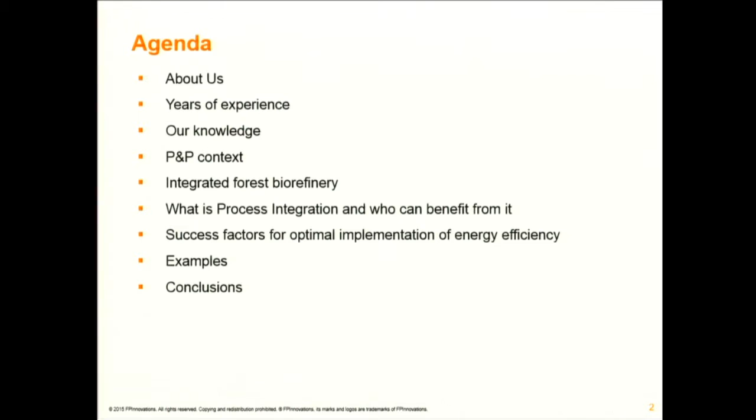So, as you can see in the title, the subject is going to be kind of similar to what Professor Paris just talked about, but with a much lower level of detail. So if there's something that you didn't understand in the previous presentation, I hope you will understand in this one. So today I will give you a brief explanation of what FPInnovations does and what we are, the context of the pulp and paper industry, what an integrated forest biorefinery is, what process integration is and who can benefit from it, the success factors for the optimal implementation of energy efficiency techniques in the actual processes, some examples and the conclusions.

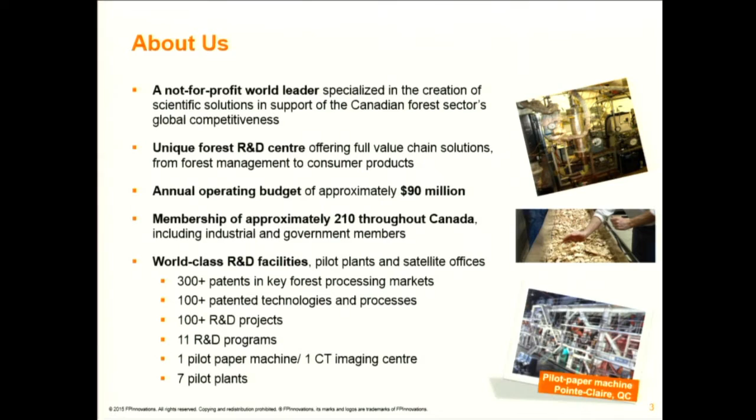So what we are: FPInnovations is a not-for-profit organization. We are a unique forest R&D center that considers the full value chain of the forest. We have approximately 210 members throughout Canada, that means Canadian mills, governments, universities. And we have world-class R&D facilities. We have pilot machines, we have many R&D projects, we are very active in developing patents. And as you can see here, we have been around for a while.

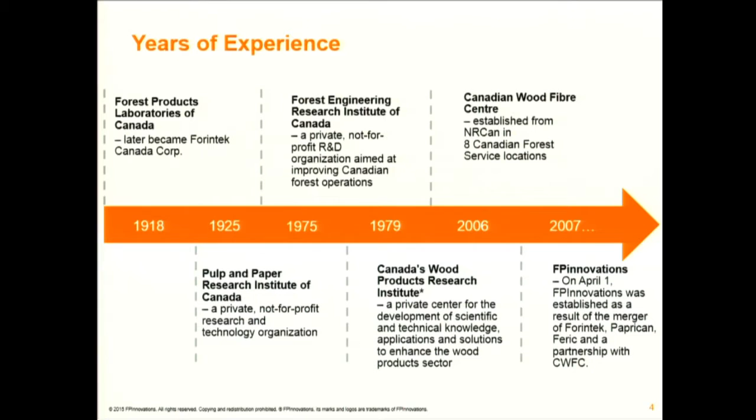FPInnovations is the merger of three former research institutes: the Pulp and Paper Research Institute of Canada, the Forest Engineering Research Institute of Canada, and the Forest Products Laboratories. So in 2007, the three organizations merged to have one voice when dealing with the forest industry. So that's how FPInnovations was born.

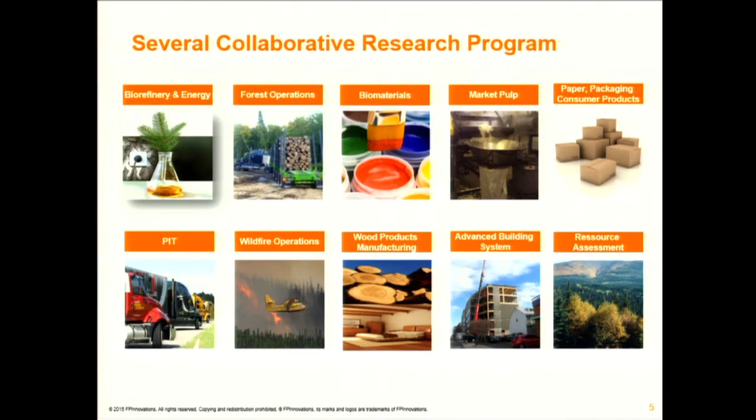We have 10 research programs. So basically, when we talk about energy, we talk in the biorefinery and energy sector, but also about market pulp. This is when we talk about energy efficiency related to projects. But PIT is one of our programs; they look at energy efficiency from the perspective of cars and improving the efficiency of fuel combustion and stuff like that. So you can see that we see energy efficiency from many perspectives. But myself, I work in the market pulp and the biorefinery program.

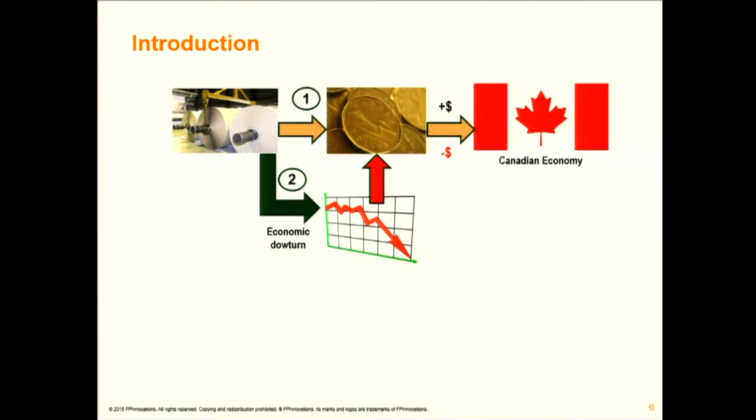So as Mr. Paris just mentioned, the pulp and paper industry was a big contributor to the Canadian economy. It still is. However, the economic downturn of the industry and also the global economic situation had a negative impact on the Canadian economy. So the industry started thinking about what they can do to improve and become more profitable and still remain a big contributor to the Canadian economy.

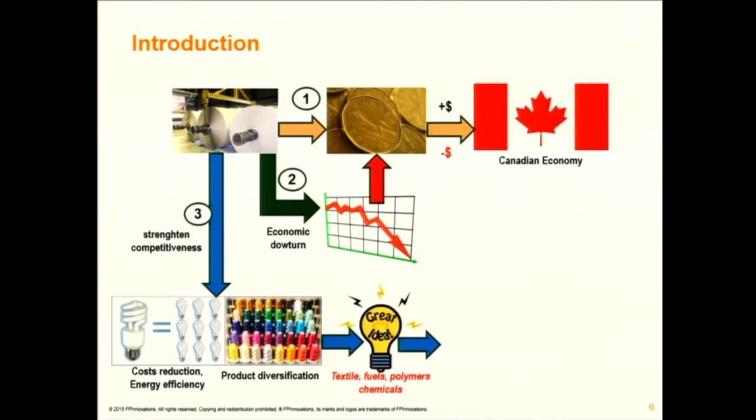So they looked first at cost reduction. For example, here's where energy efficiency techniques appear, but they also wanted ways to diversify the products that they were producing. So for example, the ideas that appeared were that they should enter textiles, produce fuels, polymers, chemicals. So there is a bunch of options that appear and that still need to be evaluated.

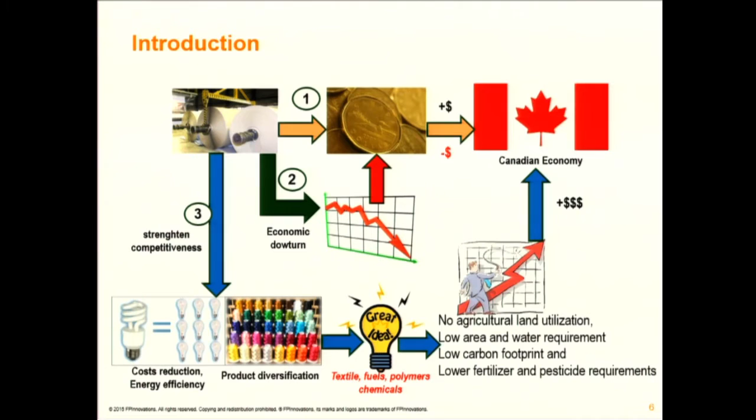Forestry has an advantage, for example, when we compare ourselves with agricultural land, because we don't use agricultural land, so we're not competing with producing food for human beings. The area required is lower, it's a lower carbon footprint, and also we don't use pesticides or fertilizers. So when we talk about biorefinery, this is the typical definition: the utilization of forestry biomass to produce a spectrum of products by various extraction and transformation pathways.

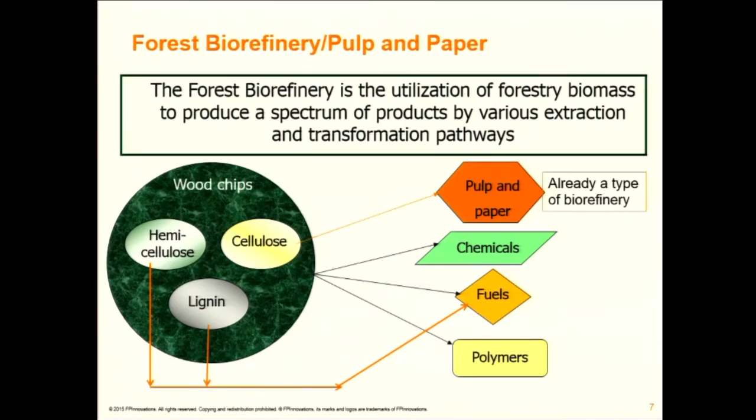So in industry, the processes are already a kind of biorefinery, but now what we are looking for is to use these two and to produce value-added compounds that will bring more revenues to the industry. So then we will remain economically profitable.

So to give you a context in terms of the energy aspect of the industry, the pulp and paper industry is Canada's most energy-intensive sector in the manufacturing industry. It accounts for 25% of the total manufacturing consumption, 30% of the total manufacturing cost. And one important thing is that of all the energy that the pulp and paper industry uses, 55% is generated from biomass. So still, there is 45% that comes from somewhere else: fossil fuels, or electricity generated by different means.

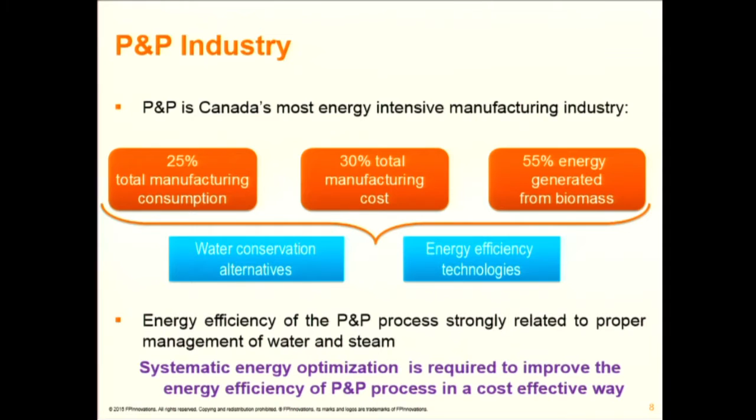So that means that the industry needs to look for energy efficiency technologies. That's where this comes in. Also, water conservation alternatives. And as Professor Paris explained, in pulp and paper processes, water is used, but this has a big relationship with the utilization of energy. If a process uses too much water, that means that the process is using too much energy. So that's why we need to take a look at both aspects when we try to improve the energy efficiency of a process. So what we want is a systematic energy optimization way to improve the energy efficiency of pulp and paper processes in a cost-effective way. That's very important.

So to give you an idea, as Professor Paris mentioned, there has been a decline in the pulp demand overall. So that means that the current pulp and paper mills were designed for other capacities. So now the mills are working with a different set of operating conditions, with a different configuration, and with different utility systems. Those are the systems that deliver the steam and the hot water that the process requires. So the initial design of the plant is completely different to how it is operated. So there is a need to improve the operations of the process. And more than a need, it's also an opportunity for the mills to reduce their energy cost and also to diversify the revenues that they generate.

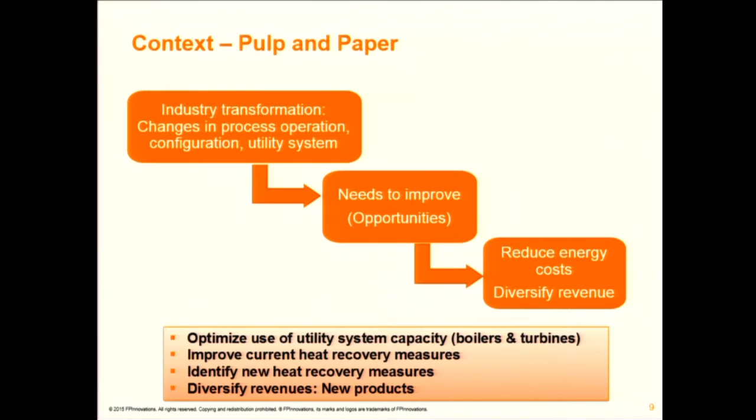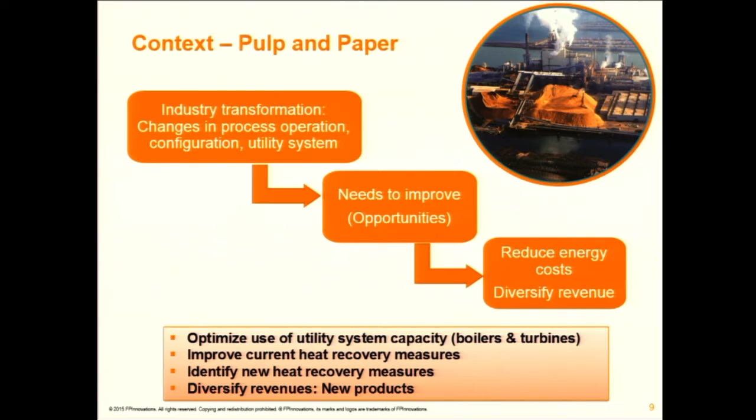So for example, when we look at energy efficiency in a mill, we try to optimize the capacity that they have in their boilers, in their turbines. We try to improve the current heat recovery measures that they have in place, and also identify new ones if it's possible. And the other thing that we look at is diversifying the revenues. So here I just wanted to put an image of what a pulp and paper mill looks like. You can see there is a lot of steam going on. So this is a lot of energy that is being wasted. So even though pulp and paper mills are integrated, there is still a big opportunity to recover the energy and to make them more profitable.

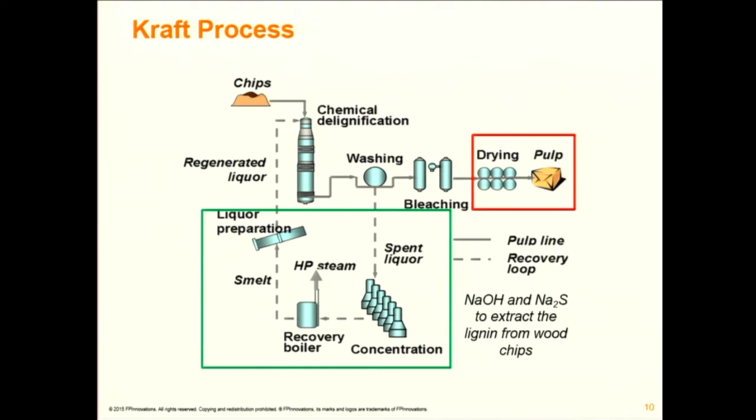So just to give you a brief explanation of what's a pulp and paper mill. This is a kraft process. So basically, you have a chemical delignification part where you separate hemicellulose, lignin, and cellulose. As I said before, what we want for the final products in the paper is mainly cellulose. So in the washing and the bleaching sections, we take out all the lignin and hemicellulose that remains in the process. Then we dry the cellulose, and that's our final product. In the recovery cycle, we recover all that lignin and hemicellulose that remains, and we burn it to produce steam that is then used in the process, and also to recover the chemicals that were used initially. So you can see that the process is already kind of integrated, and that's what makes it economically feasible.

So just to go a little bit more in detail, you have, as Professor Paris mentioned, the pulp line, and you have the recovery loop. But all around this process is where all the energy is produced. So we have a steam system; we produce steam through different types of boilers that can use biomass or fossil fuel. Some of them use the black liquor, that is the hemicellulose and lignin contained in the wood chips. And we are using water. Nowadays, one of the ways pulp and paper mills are diversifying their revenue is to produce power. So units such as condensing turbines or back pressure turbines have been implemented in pulp and paper mills to export power to the grid.

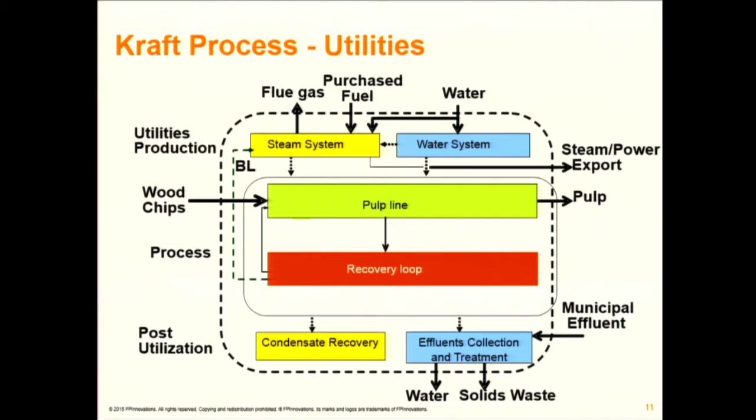So, in addition to the complexity that the process already has, if we want a biorefinery, then we will add completely new processes. One of the advantages that the integrated forest biorefinery has is that it has the kraft mill with already all the utilities, already all the heat and water. And we just need to find a way to integrate them, to make them more profitable.

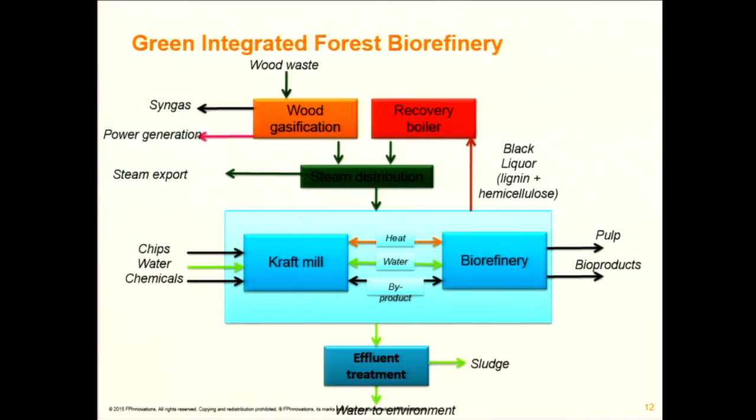And there are other options, for example, using a gasifier. So they can produce additional compounds, additional value-added products, power, and then supply the steam that the whole biorefinery will need. However, we need to maintain the core product so the mills can still run.

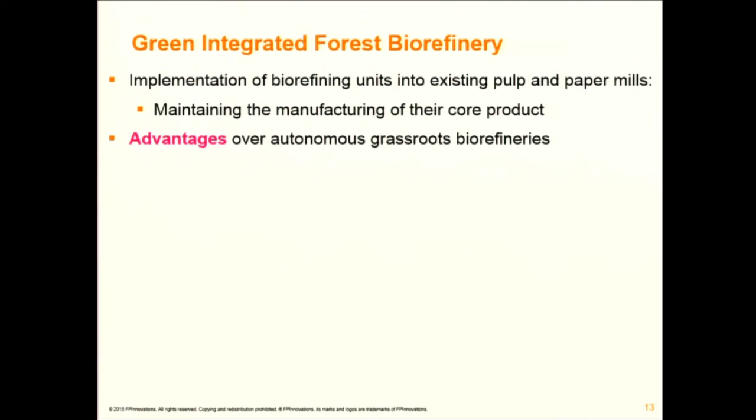So there are some advantages of the integrated biorefinery over a new biorefinery. For example, in kraft mills, there is already the infrastructure in place. That means we have all the support networks, direct access to the raw materials. There is attractive utility cost, and there is qualified manpower to run the mills and to run the new plants. So everything is already in place, and there is a lot of infrastructure that can be used to integrate the process. We don't have to start from zero.

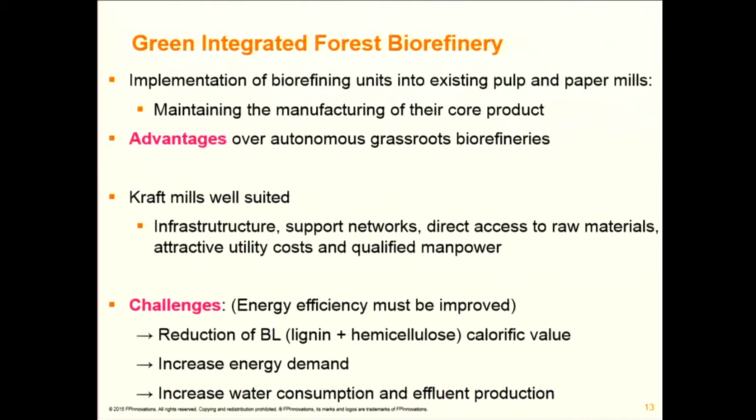However, there are challenges. Energy efficiency must be improved, because there's going to be a reduction of what we were previously using as a fuel for the process. Now we want to use lignin and hemicellulose for another value product. That means that the process has to be more efficient, so it doesn't increase its energy consumption. And also, we don't want to increase the water consumption and effluent production.

So one thing that characterizes the way we approach the studies is process integration. When we talk about process integration, we analyze a process as a whole. So we don't optimize just specific parts. As I just mentioned, the pulp and paper mills have different departments. Every department has a different need for steam, a different need for power. So when we look at the process, we look at the process as a whole.

That's because what was found before is that when you're optimizing just one specific part of the process, that might have a negative impact somewhere else, and the overall efficiency of the process will not be improved. So that's the main mindset that we follow when we target energy efficiency.

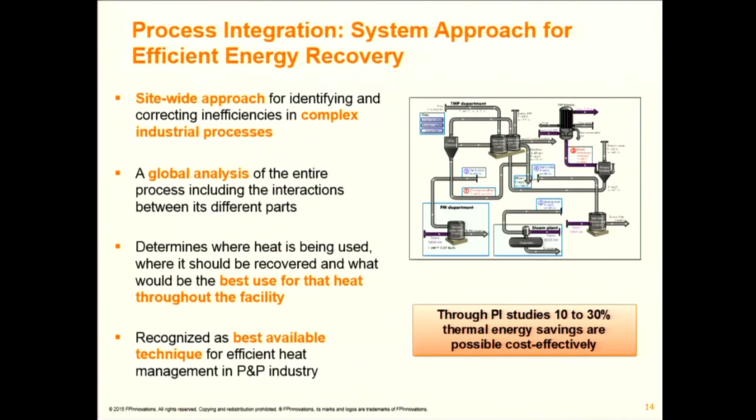So process integration is a site-wide approach that identifies and corrects the inefficiencies in complex industrial processes, such as a pulp and paper mill. As mentioned before, it's a global analysis, and what we want is to determine where the heat is used, where it should be recovered, and the best way of doing it. This technique, process integration, is a best available technique, and it has been used in the pulp and paper industry with savings between 10 and 30% reduction of energy consumption. So you can see how powerful it is if it's correctly applied.

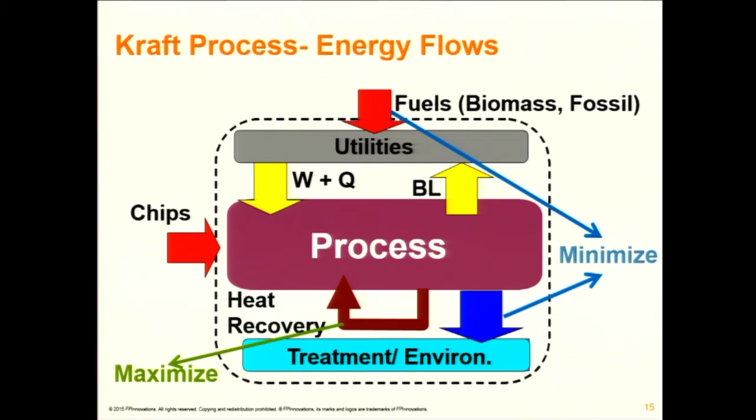So I come back again to the same diagram that I mentioned before, but much more simplified. You can see the energy flows that exist within a process. What we want is to maximize all the energy that is used within the process while we are minimizing the fuels and minimizing what we are wasting. Because if the process is not efficient, every extra energy that we put in is extra energy that is degraded and then sent to the sewer or to the environment. So you can see how powerful the technique that we use is.

So the technique that we use, as Professor Paris mentioned before, just going a step backwards, is based on a graphic representation. What we look at is the quality of the energy that is used in the process and the quantity of the energy that we are using. Basically, when we have a chemical process or pulp and paper processes, what we supply to the process is a high temperature energy source. In this case it would be steam.

Let's say normally we supply steam at 140 degrees Celsius. However, the process requires a lower temperature, a lower quality of energy, around 70 degrees for most of it, let's say, to heat up water. And then there is energy that is going through the effluents. Normally this energy goes at, let's say, between 30 and 50 degrees Celsius. So what we are looking for is to reuse the energy at this stage, so we don't waste high temperature energy that could be used for something else.

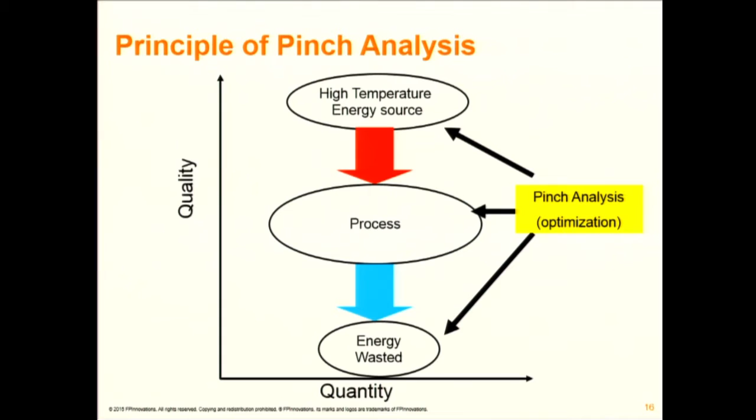So here is where the pinch diagram comes in. This is a representation of the temperature, that is the energy quality, and the enthalpy, that is the energy quantity of a process. What is very powerful about this tool is that it's a representation of the whole process.

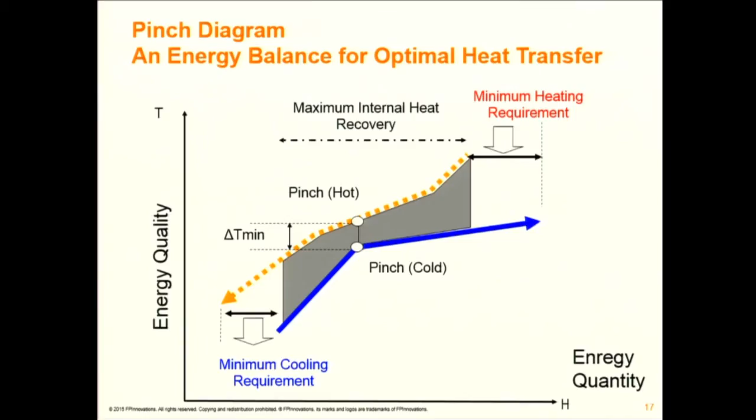So we have all the streams that need to be cooled down, and we have all the streams that need to be heated up. And what it gives us is just a target. So it will give us the minimum theoretical heating requirement of the process, and the minimum theoretical cooling requirement of the process, or the minimum energy that we will be wasting. Okay, so this is just a parameter that we use to identify the projects that we are going to implement in mills.

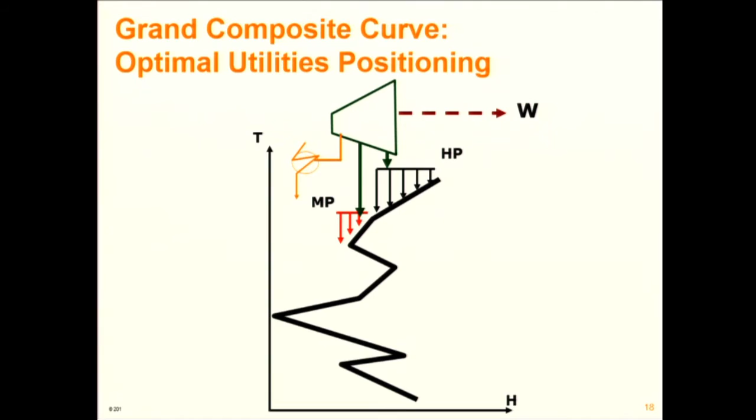There is another tool of the analysis that is also based on the temperature versus enthalpy diagram. It's called grand composite curves, and it's just a temperature profile of the process. And what it allows us is to determine what's the temperature of the utility, of the steam, that needs to be used. So that will help us to increase how much power we can produce. And if we are to implement heat pumps, it also tells us where the heat pump should be placed, so we actually recover energy.

So just from a practical perspective, in order for this to be successful, yeah, it seems very nice, it's a great methodology, and I can tell you theoretically it works perfectly. But the thing is that in the context that we were working, it's mills that are already there, mills that already have internal heat recovery measures in place. They already have a mindset about energy. So when we go there, we rely a lot on how we communicate with the engineers there.

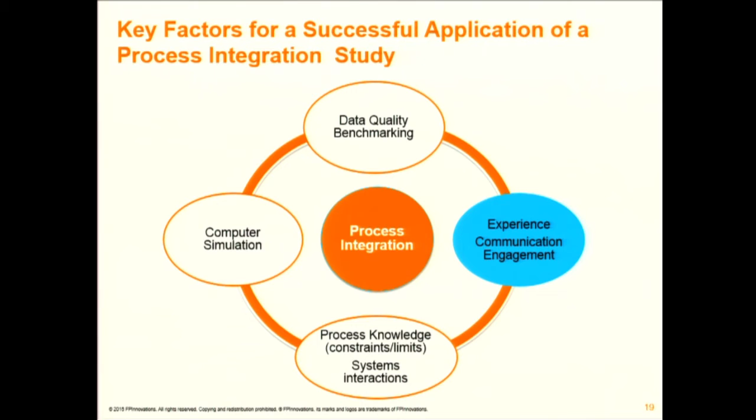Normally, the people that work in the process know the limitations, they know the constraints of the process. So really, we need to include that in our analysis. If not, anything we propose is not going to work. So that is the key part. Then we also use computer simulation, which has helped us to try scenarios of what will be the impacts of changing the operating conditions of the process, or introducing new measures for internal heat recovery. Also the quality of the information that we receive: if we don't have a good set of data to do the evaluation, anything we propose is not worth it. It's like garbage in, garbage out.

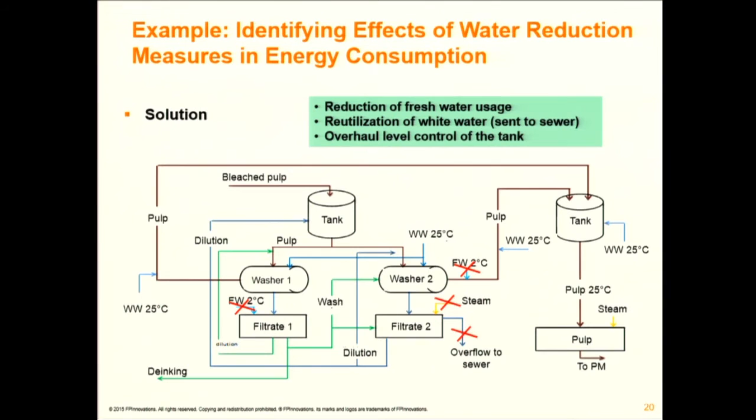So just to give you a brief, this is an example of a current mill. As you can see, it's very, very difficult. This is just a water network. These are different departments, not actually the same department. So what we were looking at, from a process integration perspective, is to reduce the overall consumption. We realized that the mill was using fresh water, then they were using steam, and then they were sewering to the effluent, and then they were using fresh water somewhere else. So imagine you're here in Canada, in the winter, you're heating water at 60 degrees, and somewhere along the process you're using water at 2 or 4 degrees. So that's very inefficient.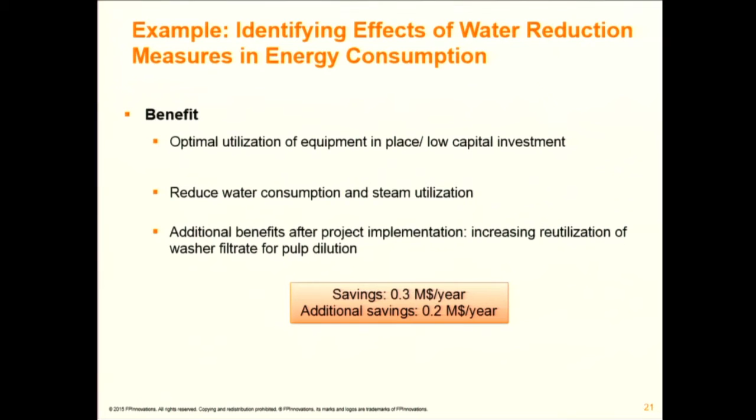So maybe one person in one department will not realize, but when we look at the whole picture, we identify that that's something that needs to be improved. The saving for sure will not happen here, but will happen here. So that's a mindset that we bring. For example, in this case, when we realized that the mill had this problem, there was no need to invest in capital, and they were able to reduce water and their steam consumption. The savings that they get were $300,000 per year, and it could increase to $500,000 if they consider something else. So you can see the impact these projects can have. It's immediate.

Another aspect that I mentioned before is the optimal integration of biorefinery technologies. For example, we look at lignin extraction. At FPInnovations, we have patented a way of extracting the lignin that has already been implemented in one mill in Alberta. But from a process integration or energy efficiency perspective, we have to look at how extracting this lignin will impact the chemical balance, the effluent treatment, and then the overall energy balance. So once we are about to implement a biorefinery technology, it's good to look, from a process integration and energy efficiency perspective, at what the impacts will be on the overall mill.

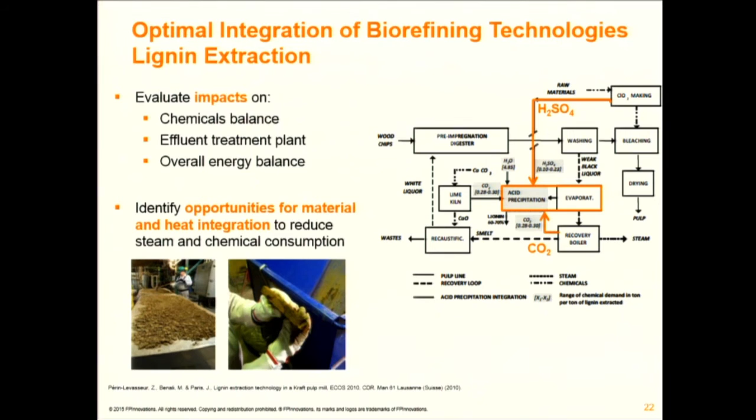So for example, here you can see I put an example of the lignin that they are producing. Another example is if we want to convert a kraft mill to a dissolving pulp mill. It's just a different type of product. In pulp, you have cellulose and a small amount of hemicellulose. In dissolving pulp, you don't want hemicellulose at all. So one objective would be to convert the mill and extract the hemicellulose so we can produce something else.

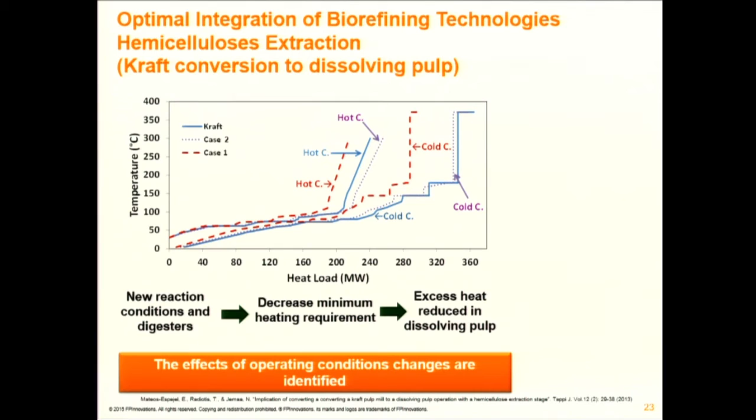So here, the only thing that I wanted to mention, and what we evaluated when we were doing that, is that extracting the hemicellulose, and how it was done, was changing the overall balance of the mill. It was changing the requirements of the mill, and also how internal heat recovery measures need to be implemented. So for example, if the mill was thinking of implementing something before the change, they actually should wait till after, because the whole overall balance will change.

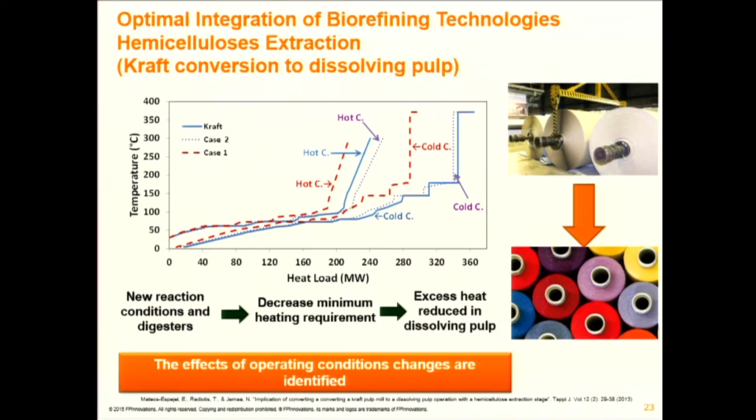So just to give you an idea, this was the product that they had initially, and this was the product that they were going to. They were trying to target something in the textile industry, a raw material to produce in the textile industry.

So another example: I mentioned before that you are going to extract the hemicellulose. So then what do you do with the hemicellulose? For example, we evaluated, actually it's something that I did when I was in the university, the impacts of a biorefinery that produces ethanol, and how that will interact with the mill. Normally what we found is that the opportunity of heat recovery was actually coming from the biorefinery, or the ethanol producing facility, to the mill. So that was the way the energy was going to flow.

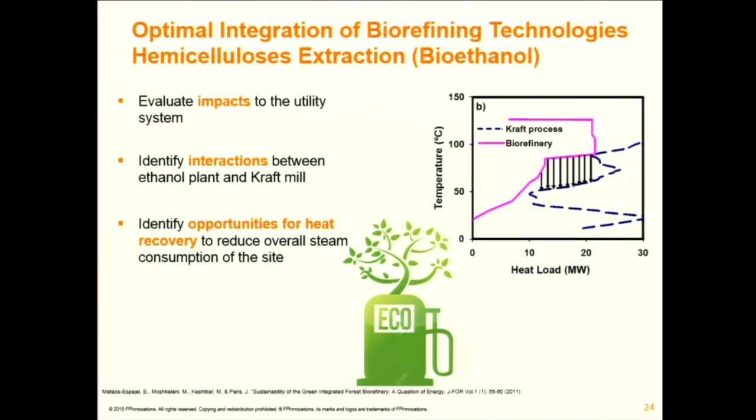So for example, this is just a representation of the energy balance, of the temperature that was required, what this process was rejecting, and where it could be used in the process. So that gives us an idea of how the two processes could interact and how that will reduce the overall energy consumption.

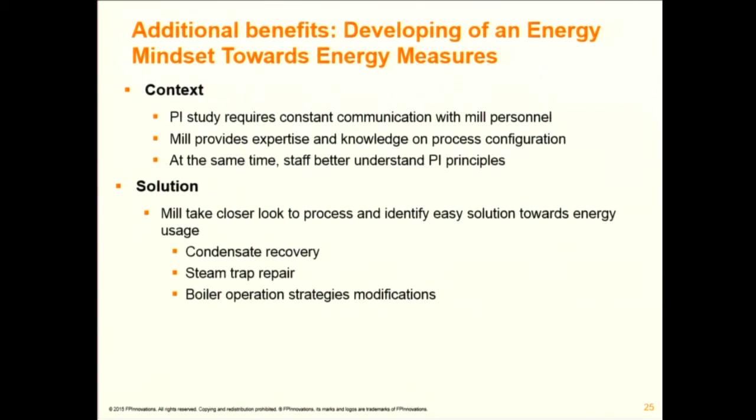So one of my last points is something that also makes this type of project worth it to the mills: these process integration studies, looking at the overall steam and energy balance of the process, are very intensive. That means that we have a strong collaboration with the mills. So at the same time that we are doing the study, the mill is also taking a closer look at how they are operating. I had an experience where, as we were doing a full study in the mill, the mill was realizing that the way they were operating the boilers was not optimal, and before even finishing the study, they were getting savings that were worth how much they were paying for it.

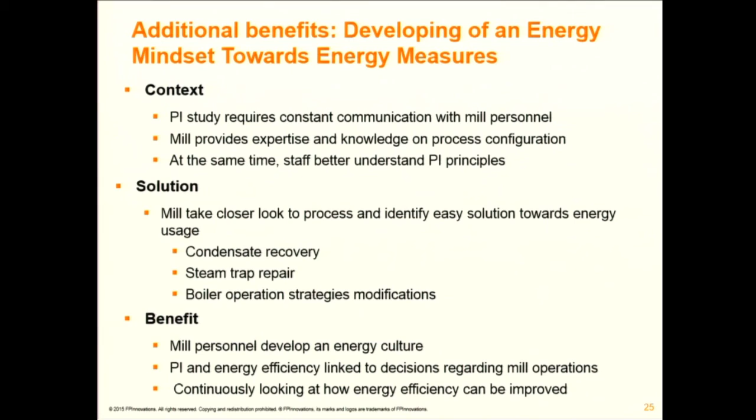So they get this benefit that they develop an energy culture, and they also start thinking from a process integration perspective when they look at energy efficiency. So they not only look at one process, but they start also looking at what they are doing in their part of the process that will have an impact somewhere else. Because sometimes what happens in some mills is that they are just concerned with the operation of their department, not with the operation somewhere else. And that has an impact when we look at the big picture, and that's the perspective that process integration brings.

So to finish, pulp and paper mills can recover millions of dollars through implementation of energy efficiency measures. And energy optimization is required for a sustainable forest biorefinery. What we found is that to be successful in applying this in the real process, apart from the methodology and the understanding of what process integration is, we need a close collaboration with the people involved. We need expertise and understanding of the process, how it is operated, why the operating conditions are like that. And also that we develop an energy culture in them.

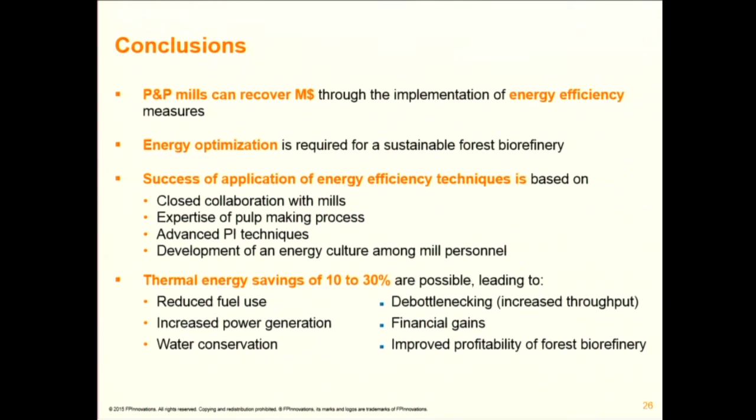As I mentioned before, thermal energy savings between 10 and 30% are possible, and they can reduce their fuel, they can increase power generation with that, they can improve their water conservation, they can debottleneck the process, which can even help them increase their production in some cases, and of course they will get financial gains and improve the profitability of a future forest biorefinery if that's the case.